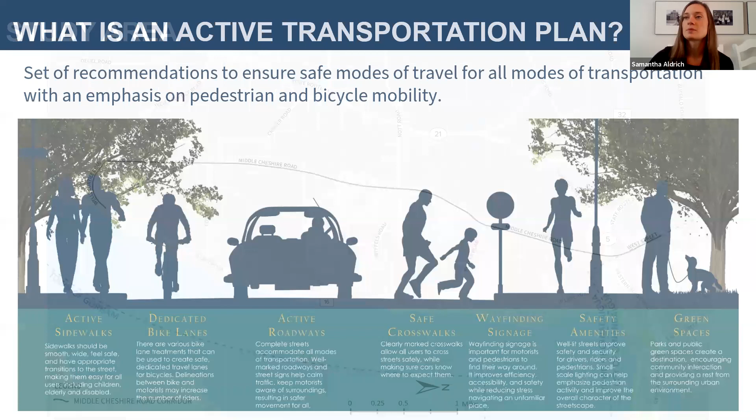The study area for this effort really spans Middle Cheshire Road and West Street from approximately Wells Curtice Road, where it connects to West Lake Road or County Road 16, to Bristol Road within the city of Canandaigua. Our team understood that there were a variety of recreational and institutional destinations in proximity to the corridor, so essentially the impetus of this plan was to identify ways to enhance connections to those destinations in a safe manner.

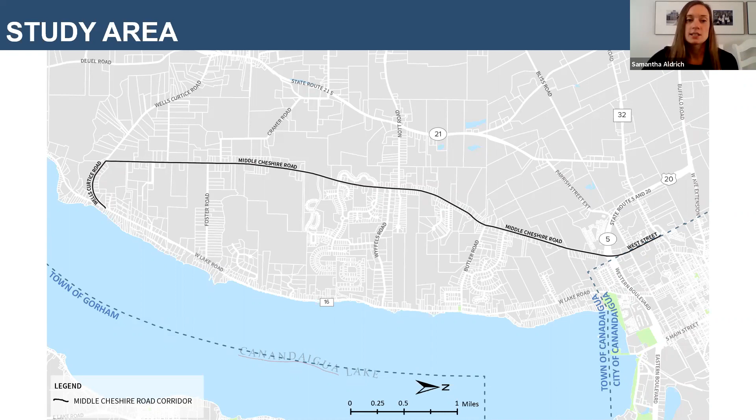One of the things along the corridor that we took a particular look at was the intersection of Routes 5 and 20, since that was identified as a barrier for pedestrians and bicyclists coming from the residential section of Middle Cheshire Road entering into the city near the Thompson Hospital.

There are a number of objectives that we set out to achieve through the study, many of which relate to the preferences of pedestrian and bicycle treatments that residents and users would like to see along Middle Cheshire Road. We understood that the majority of Middle Cheshire Road is comprised of residential and agricultural land uses, so it was important for us to talk to residents about the types of multimodal transportation options that they felt comfortable using along the corridor.

It was also important for us to examine and identify improvements at key intersections, such as the Routes 5 and 20 intersection, which currently acts as a barrier at the town-city line. What are some ways that we can increase pedestrian and bicycle access at that location?

In addition to some of the pedestrian and bicycle treatments on the roadway, we also wanted to explore placemaking and amenities throughout the corridor. What are some ways that we can enhance the sense of place and make it more comfortable and enjoyable for users? Is there an opportunity to enhance wayfinding signage to direct people to different areas along the corridor, such as the switchback trail that connects to the city of Canandaigua Lakefront? Or are there opportunities for benches and seating along the corridor?

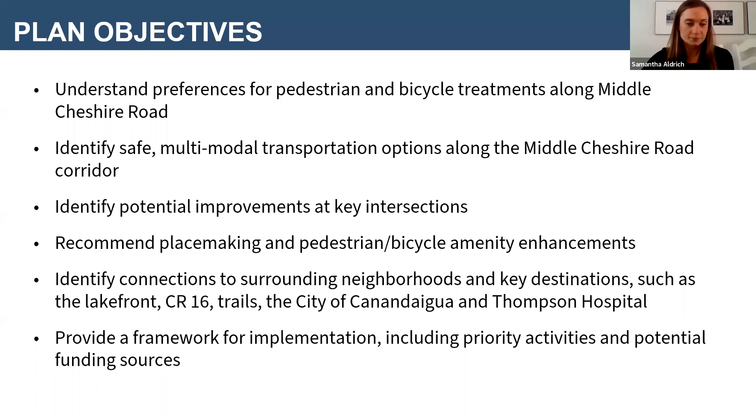The project really had five main components that allowed us to achieve these goals and objectives, and community engagement, being the first task, was something that really extended throughout the entire process. We implemented a myriad of methods, including steering committee meetings, public workshops, stakeholder meetings, as well as online surveys. I'll talk about those methods in a couple of minutes, but just know that's something that we thought was really important to the overall process.

We also conducted an existing conditions assessment to look at physical characteristics of the corridor, which led us to derive key opportunities and constraints through a needs assessment. Based on these opportunities and constraints, we did recommend a set of treatment alternatives that we'll talk about later in this presentation. All of this is encompassed in a document with an implementation framework that's intended to be used as a guide and community resource for the town and the city to implement these enhancements as resources become available.

As I mentioned, community engagement was an important part of the process. Due to the COVID-19 pandemic, we did have to adjust some of the methods of obtaining input. However, we were successful in reaching a variety of residents and stakeholders in the community, which led to great feedback and this community-based plan that we are presenting to you today.

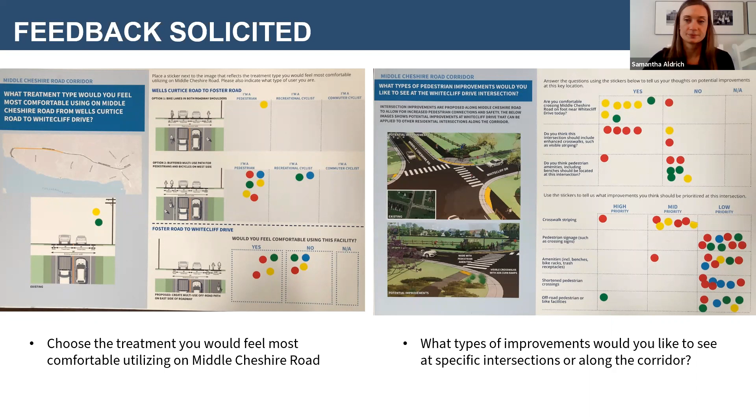And what did this engagement tell us? On the screen here, you'll see a few key themes from the engagement. The first one being that traffic speed was a concern along the corridor. In order to address this in the plan, we have included a variety of pedestrian and bicycle treatments along the corridor, including crosswalk enhancements and signage, things like that, to alert drivers that there may be multimodal users on the corridor, and in turn have them slow down.

Off-road shared use paths were also a preferred treatment option for residents along the corridor, so we wanted to be sure to include this as some of the treatment recommendations as well.

Crosswalk striping and intersection enhancements were a desired improvement for this area. We have recommendations related to how to increase visibility of crosswalks while enhancing visual character, and Ted will talk a little bit more about this when we get into the specifics of the recommendations.

Talking about amenities such as bike racks, benches, and trash receptacles, these were not as high of a priority to respondents. However, we do have a number of placemaking amenities recommended in areas where we would likely see higher pedestrian usage, such as the Thompson Hospital area or the switchback trail entrance that leads into the city of Canandaigua and the Canandaigua lakefront.

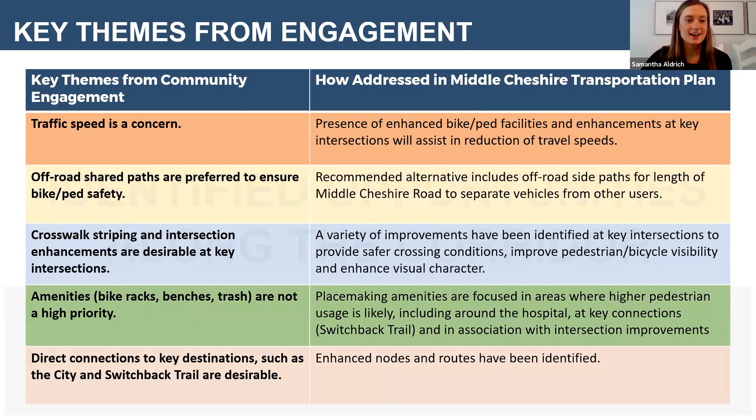From there, I will pass it on to Ted to talk about some of the identified opportunities that we saw along the corridor. All right, thanks, Sam.

Good afternoon, everyone. My name is Ted Liddell, and I am a landscape architect with Bergman. I'm going to be walking through with you today some of the recommendations that the project team has come up with throughout this process.

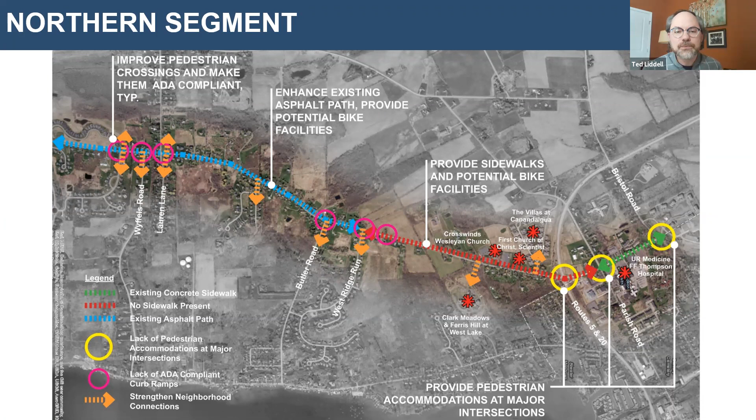What you're looking at on the screen right now is one portion of our needs assessment where we were looking at opportunities and constraints throughout the corridor, based on our existing conditions analysis and feedback that we received from the community during the public engagement activities and the survey.

We started to look at what those opportunities and constraints were throughout the corridor, and how those could potentially influence recommendations that we would want to make in terms of ped bike amenities and multimodal transportation.

Looking quickly at this graphic, what it highlights is that the intersections up near Thompson Hospital, Parrish Street, and Routes 5 and 20 were intersections that we needed to take a look at to be able to provide some of that ped bike connection, where some of it doesn't exist today.

Routes 5 and 20, as Sam mentioned, is definitely a barrier between the northern and southern portions of the corridor.

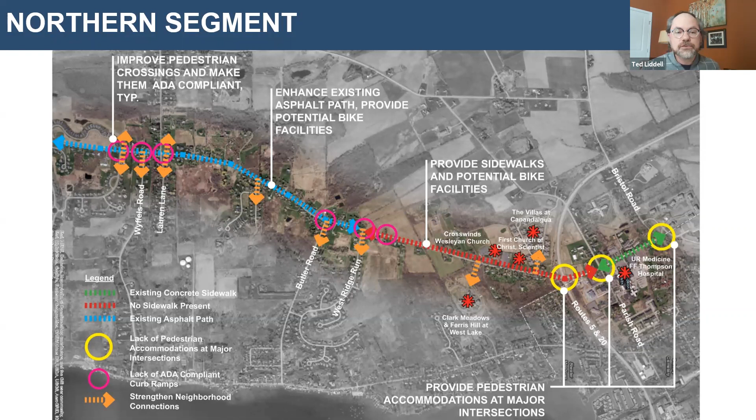In our analysis and existing conditions survey, we noted that there were segments of the corridor that did not have any ped bike amenities. So were there opportunities to complete the system and create a continuous ped bike facility throughout the corridor? And are there opportunities to connect that to existing residential neighborhoods adjacent to the corridor or other amenities like the switchback trail?

This was a connection that was identified early on, that it was important to make sure that Middle Cheshire Road was connected to West Lake. It was identified in previous studies and throughout our engagement that providing connection for bicycle users to this corridor was really important to consider from West Lake Road.

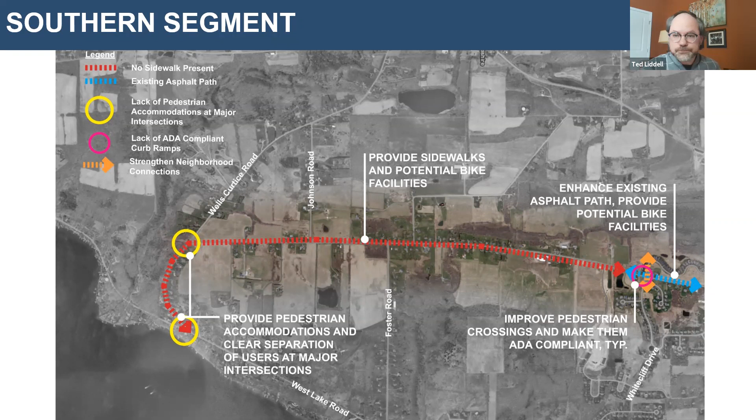So what I'm going to do is first walk through with you the bicycle and pedestrian facility improvements that we are recommending. A majority of these improvements will fall on the east side of Middle Cheshire Road, with a small portion being on the west side at the southern end.

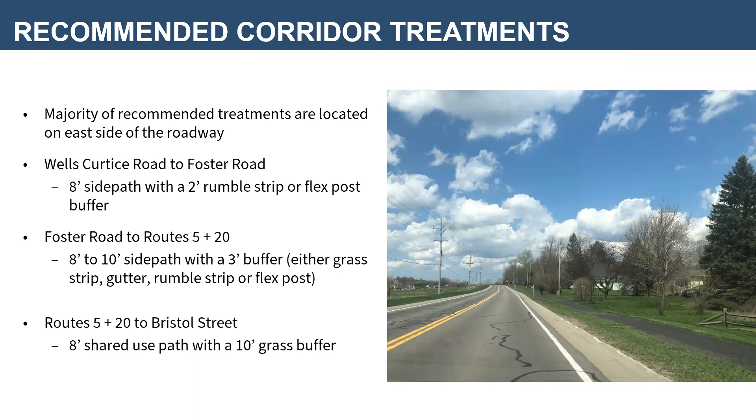But it will be a variety of trail types. We're looking at side paths and multi-use paths that will work together to create a cohesive pedestrian bicycle connection throughout the entire corridor.

We're going to start at the southern end at Wells Curtice Road, which again I had mentioned was brought to our attention as it was very important to make this connection for bicycle users from West Lake Road to Middle Cheshire through by Wells Curtice Road.

What we're proposing here is that the road be restriped and the shoulder widened to include 5 foot shoulders that would be used for bicycle users to be able to make that connection.

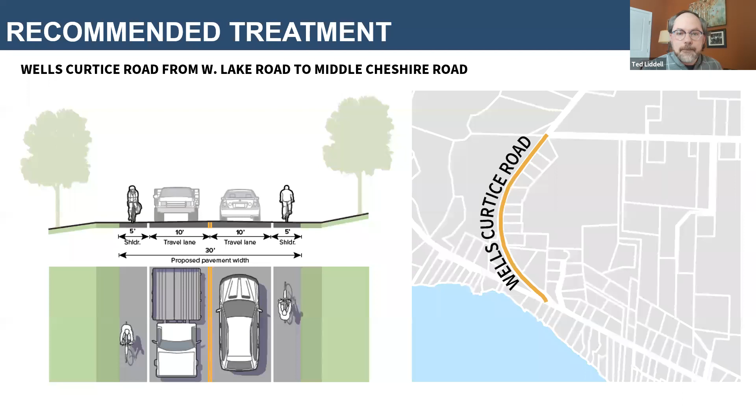Once users got up to Middle Cheshire Road, the facility would then be on the west side of Middle Cheshire. What we're proposing is an 8 foot side path with a 2 foot buffer, and that 2 foot buffer would contain a rumble strip to help signalize to drivers and prevent encroachment of drivers onto that multimodal ped bike facility.

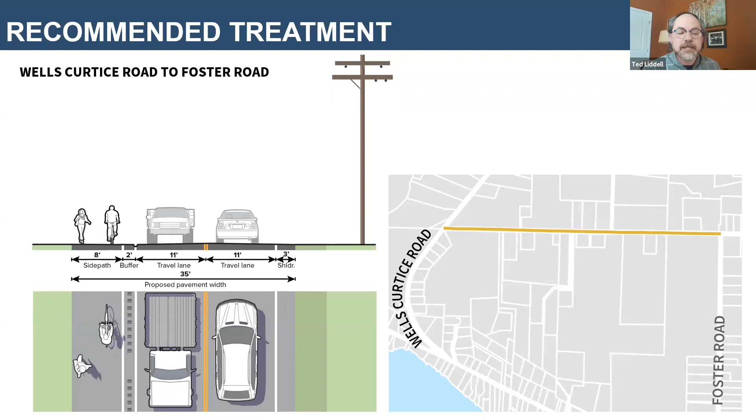In this area, one of the things that we had to consider was the existing farm practices that are occurring in this segment of the corridor. We wanted to make sure that any improvements that we were recommending didn't impede on any of the transfer of farm equipment or materials, anything that would prevent or inhibit the farm practices from continuing to function as they do today.

That treatment would continue all the way up to Foster Road. On the west-hand side here is that 8-foot shared use facility, which would then cross at the northern end of Foster Road to the east side of Middle Cheshire. This would include highly visible crosswalk markings with ADA accessible detectable warning strips, and adequate advisory signage to let people know this crosswalk will be occurring.

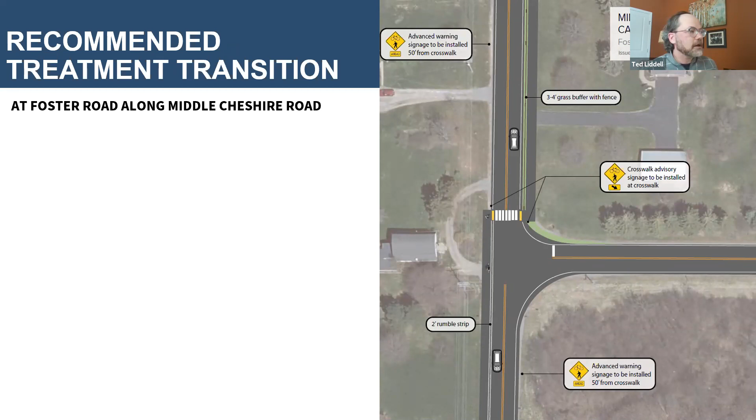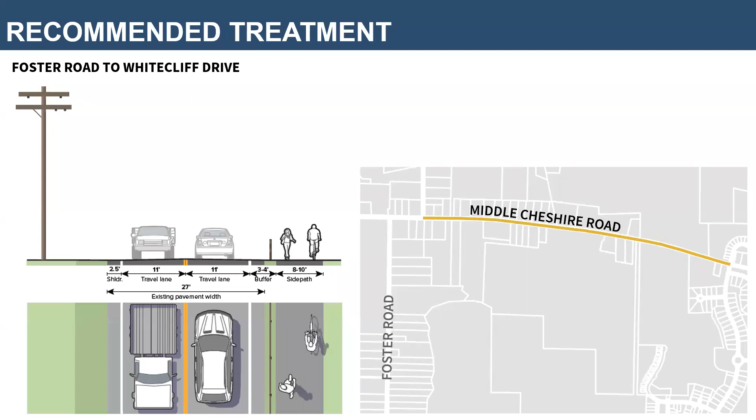North of Foster Road, we will continue on the east side with an 8 to 10 foot side path. In this segment from Foster Road to Whitecliff Drive, we're looking at an 8 to 10 foot path separated from the road with a 3 to 4 foot buffer that would contain a vertical separation, such as a fence or guide rail. It could be a variety of materials, but it would act as a vertical buffer to help delineate between vehicular traffic and the ped bike facility.

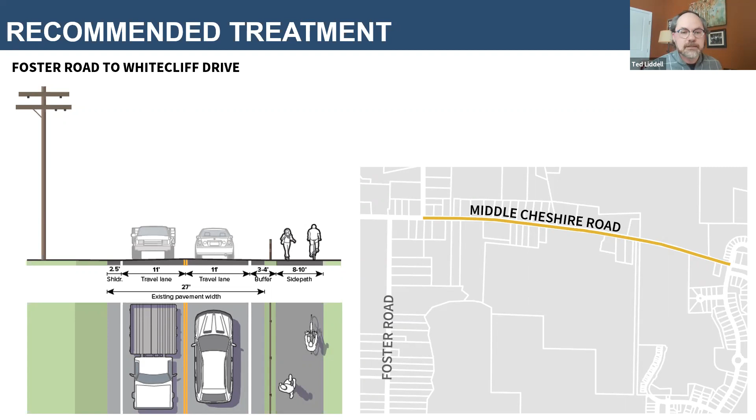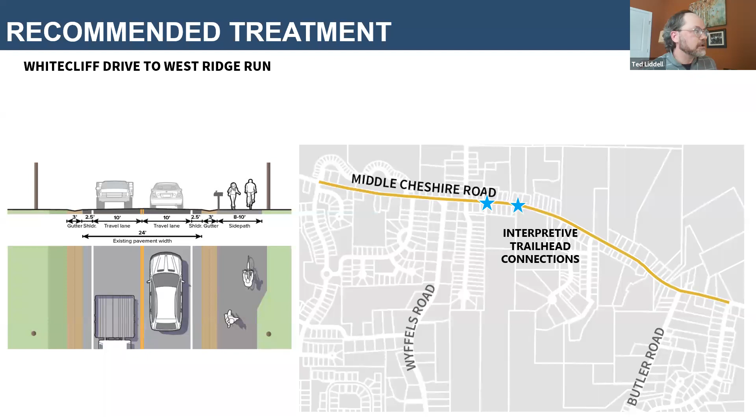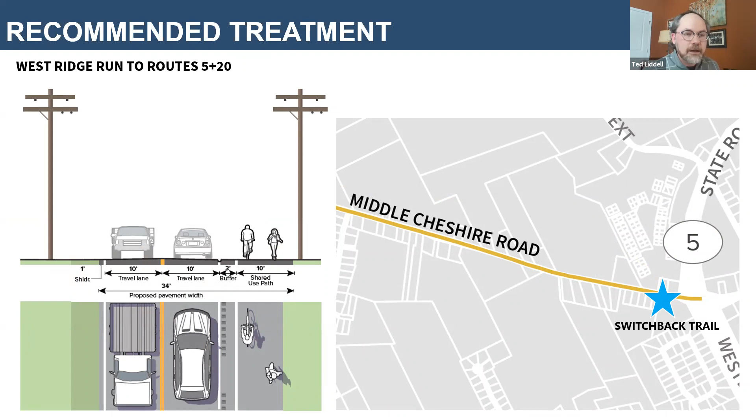As we move further north from West Ridge Run to Routes 5 and 20, the facility would transition to a 10-foot shared use path, separated again by a 2-foot buffer with rumble strips to help provide that separation and signal to vehicular users that they would be encroaching on the ped bike facility if they happen to go over the rumble strips.

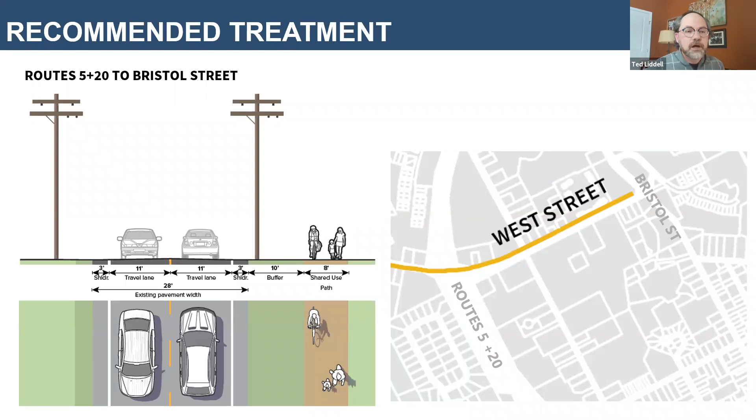North of 5 and 20 to Bristol Street, up by Thompson Hospital, there's a little more room to work with. We're looking at an 8-foot shared use path facility on the east side with a pretty good buffer of about 10 feet. This allows us to implement more placemaking elements, like bike racks, benches, facilities like exercise stations, along with enhanced landscaping. So it provides more opportunity to include those elements up by the hospital.

So those were the facilities in between the major intersections on the corridor. But there were a few intersections we looked at, and we are recommending improvements to help increase safety between vehicles and pedestrians, and to create a safer, more multimodal functioning corridor.

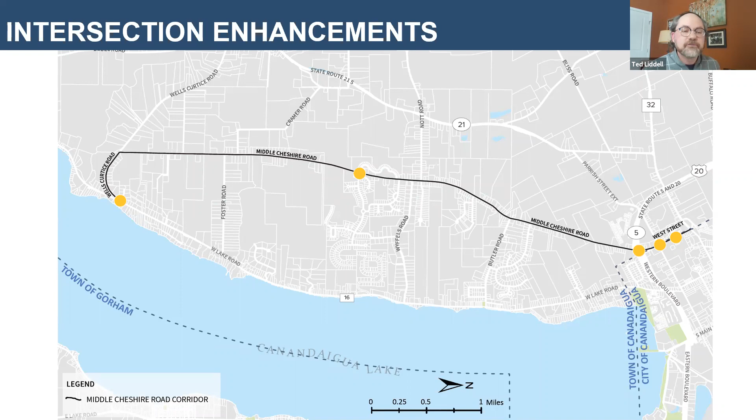We'll start at the south again, looking at the Wells Curtice Road, West Lake Road intersection. If you go out there today, the intersection is very wide and not well defined with striping for the travel lanes, and definitely not well striped for bicycle users. What we're recommending here, and this is a recommendation that has also been carried through a couple of previous studies, is narrowing the width of the intersection onto Wells Curtice Road from Westlake slightly to help define the intersection better, along with new striping, to help create that definition between the different users.

In those recommendations, we also want to take into account that there is a lot of traffic with trucks, boat trailers, and farm equipment that needs to navigate through this intersection. So we want to narrow it to make it feel more defined and comfortable for users, but we also want to make sure we're not impeding any of those other uses that need to occur and still function.

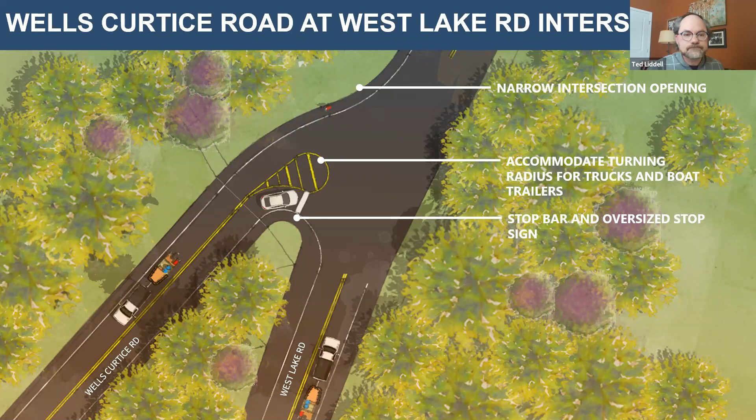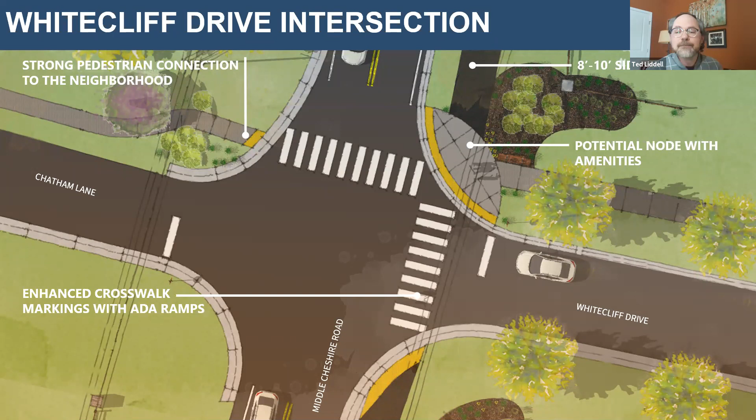At the Whitecliff Drive intersection with Middle Cheshire Road, this is an area that creates kind of a node with connections to the residential neighborhoods on either side of Middle Cheshire. Today there are crosswalks, but they don't connect to any sidewalk facilities onto the road, and there are no ADA accessible curb ramps or similar features.

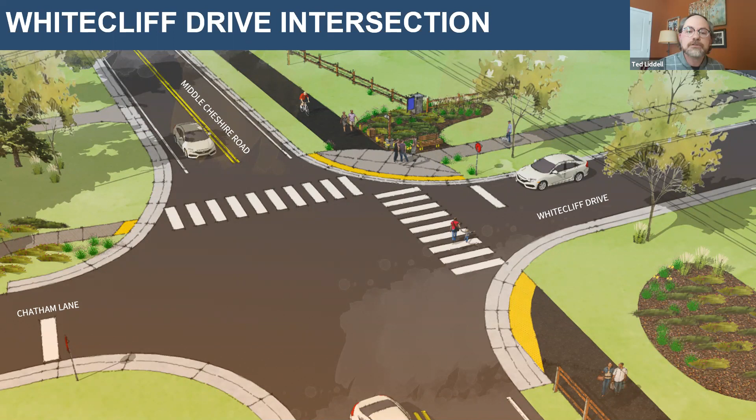So what we're looking to recommend is having highly visible crosswalk striping, making sure the crossings are ADA accessible with detectable warnings to let people know they're approaching the roadway, and creating an opportunity for a node with placemaking amenities like benches and wayfinding signage to direct people through the corridor and to local and regional destinations.

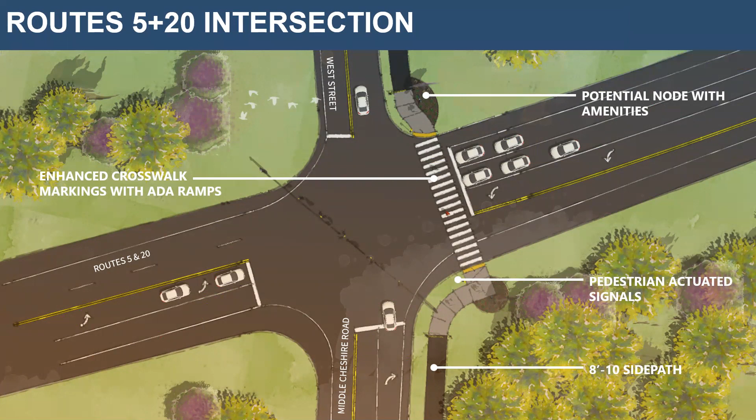Routes 5 and 20 again is a fairly significant barrier on the corridor. There are no pedestrian amenities or crossings there today on Middle Cheshire Road.

So what we are proposing is the inclusion of an enhanced crosswalk with ADA ramps and pedestrian signals, which would be included as part of the traffic signal. We'd be modifying the traffic signal to include those pedestrian signals with adequate crossing times for people to safely traverse across 5 and 20.

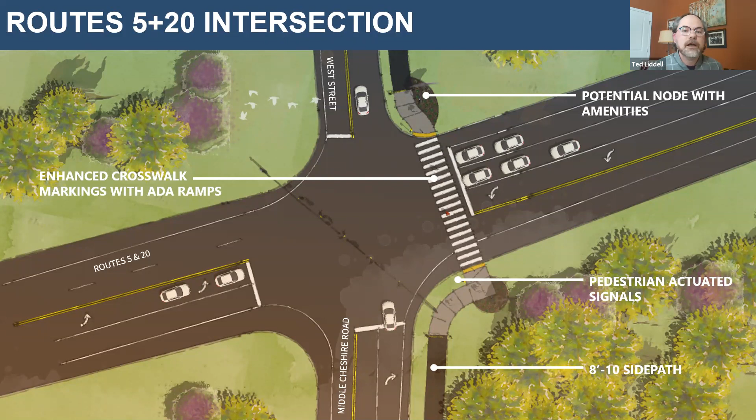I'm going to have to start paying attention, especially when something significant is coming up, like the 5 and 20 intersection.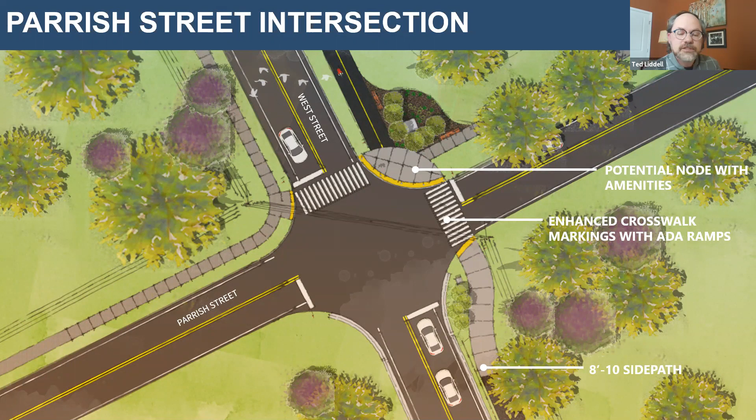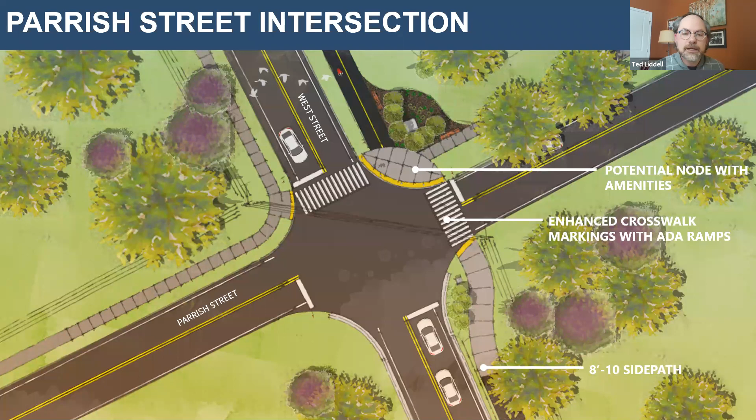So the trail or side path would continue further north up Middle Cheshire to Parrish Street, the intersection of Parrish and West Streets at Thompson Hospital. Again, we would be recommending improvements here like enhanced crosswalks and ADA accessible curb ramps, and creating nodes at that corner of the Thompson Hospital property on West and Parrish Street.

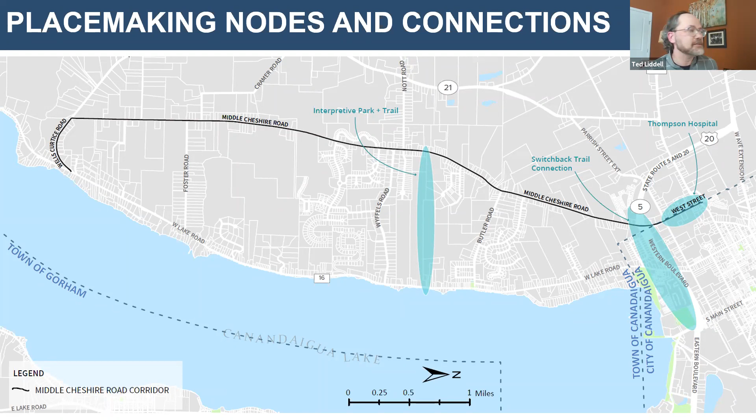Now, some of those nodes I mentioned as I walked through—we'll be taking a closer look at the area around Thompson Hospital, but also the potential for an interpretive park trail at the water treatment facility, in the middle of the corridor, highlighted in blue. Creating those connections from Middle Cheshire to the lake and to downtown Canandaigua were things we heard throughout the process as being important to include in our recommendations.

So looking at that Canandaigua water treatment plant facility, this is a very high level concept plan of an interpretive trail and park that could be incorporated on this property, creating a connection from Middle Cheshire Road on the left-hand side of your screen to Route 16 and the lake on the right. The concept for this trail would be to create a unique experience highlighting ecological and natural assets on the property.

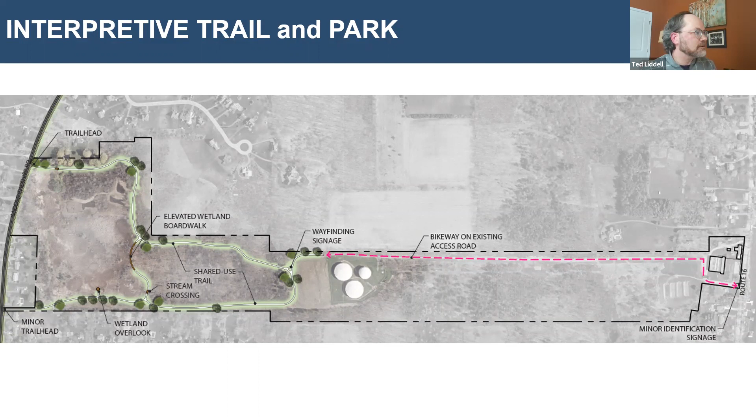As I said, this is a high level concept plan. So if this were to move forward, further study would have to be done to make sure that any environmental easements or conditions that exist today would allow what's proposed for the trail to function on the property within any potential regulations or constraints that may exist out there today.

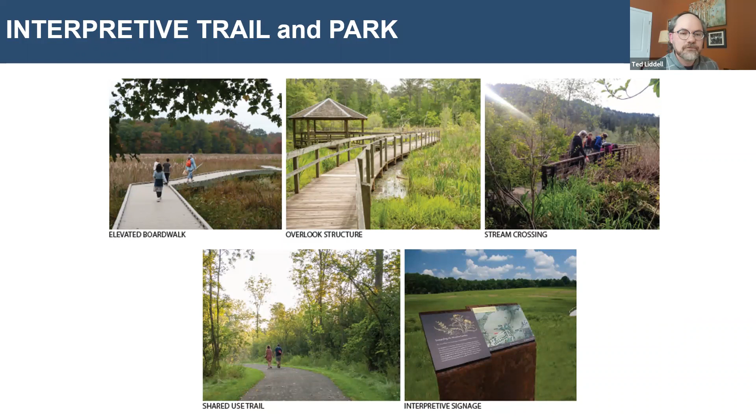These are just some representative images of the type of facility we're thinking of in this concept—creating elevated boardwalks or overlook structures through areas that may interpret wetland habitat or other environmental conditions or unique situations that occur on the site, which could be interpreted for users of the park.

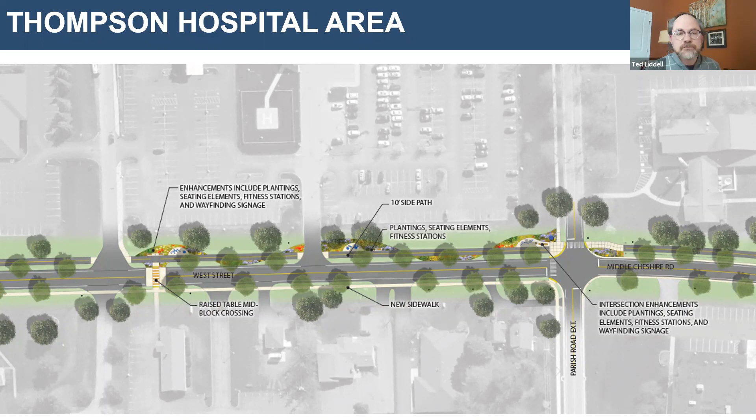In the area of Thompson Hospital, this was an area that through our site visit investigations we noticed a lot, and we also heard through anecdotal comments in our public engagement process that a lot of people who work at the hospital or at the doctor's offices or other facilities in the immediate area use this as a place to walk during their breaks or lunch. So there was more of an opportunity here to include unique placemaking elements—more benches, bike racks, and possibly fitness stations or other amenities people can use while on their lunch break.

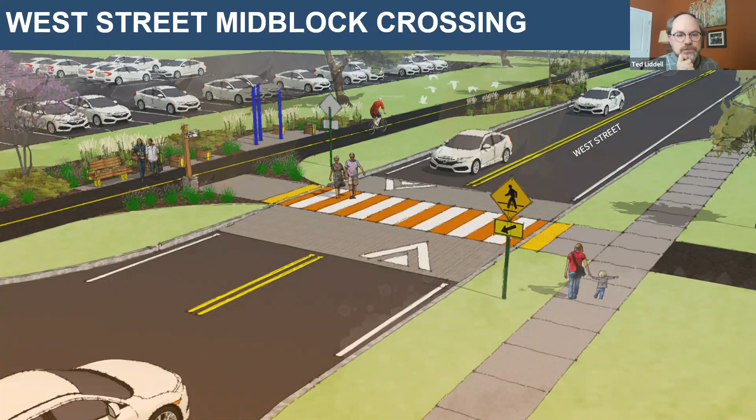This graphic shows a bit of that placemaking elements in the background here. You see those benches, wayfinding signs, and what could be one of those fitness stations. But this is also showing the mid-block crossing on West Street that exists today, connecting the hospital to some of the doctor's offices and a large residential apartment building complex on the other side of the road.

What we're showing here is a raised table crosswalk. This crosswalk helps bring attention to the crossing, so vehicles will be forced to pay attention a bit more once approaching the sidewalk, helping increase pedestrian safety. These are designed so they cause traffic to slow down, but wouldn't impede emergency vehicles, fire trucks, or ambulances from traversing over them.

They are used in the area up in Rochester and the surrounding Finger Lakes area, so they are able to function with snow plows as well, which is something we hear as a potential concern when we propose mid-block crossings like these.

The switchback trail that exists today—I can't tell you how many times I drove by here. This entrance to the switchback trail is near the intersection of 5 and 20, but I drove by so many times and never even knew it existed. It's not easily accessible and not visible from 5 and 20.

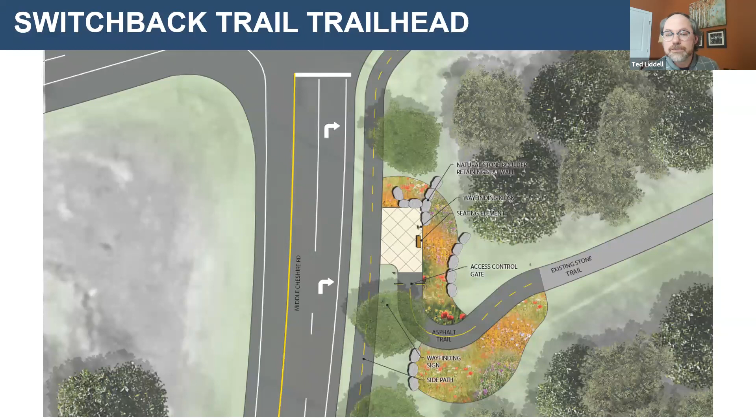So as part of the study, it was important to take a look at this and see how we can create better connectivity to the proposed ped/bike facilities we're looking at on Middle Cheshire Road, but also how we can make it more visible so people know it's there and make it ADA accessible.

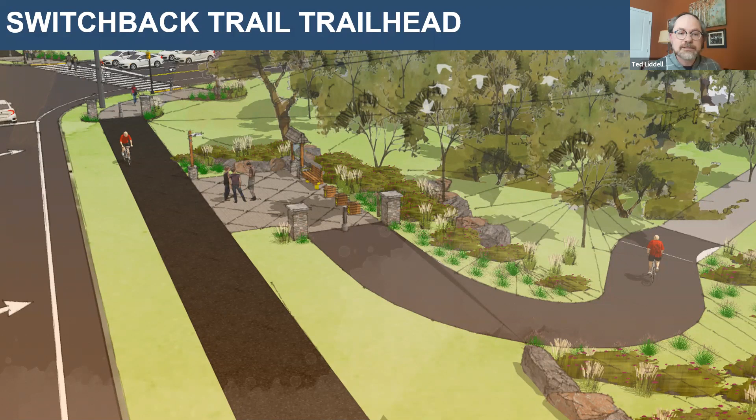What we're showing and recommending in this concept is a kind of landing pad at the higher end of the entrance to the trail. This could include kiosks for interpretive or wayfinding mapping, and again some of those benches, bike racks, and other placemaking elements to create a unique sense of place and draw attention to the trail. This also helps create, with landscaping and boulders, an accessible route down to the switchback trail, which then connects to Westlake Road, and eventually you can make your way down to the city of Canandaigua.

All right, and I think I'm turning it over to Sam, who's going to continue with some of the implementation and funding aspects of the project.

Thanks, Ted. One of the most important elements of this plan is ensuring there's a strong framework to achieve the proposed recommendations Ted just went over. We do have specific recommendations for the town and the city to implement that will result in a connected, cohesive corridor for all users of Middle Cheshire and West Street.

Keep in mind that the recommendations in this report are conceptual level, and will need to be advanced through engineering, design, permitting, and construction. As such, additional analyses may be necessary, such as traffic impact studies, to fully evaluate the treatments being recommended.